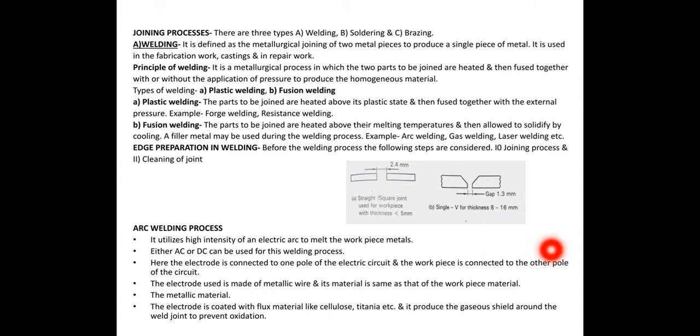Either AC or DC current can be used for this welding process. The electrode is connected to one pole of the electric circuit and the workpiece is connected to the other pole. The electrode is made of metallic wire, with material same as the workpiece material. It is coated with flux material, such as cellulose or titania, which produces a gaseous shield around the weld to prevent oxidation.

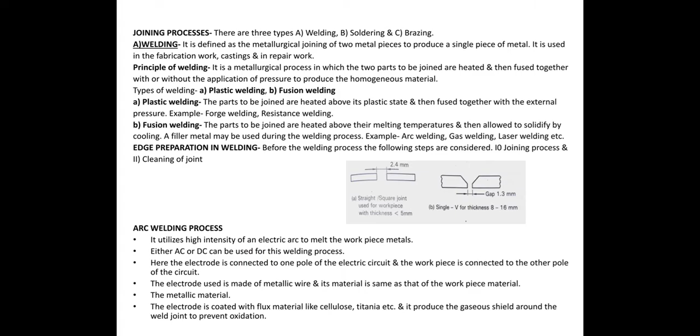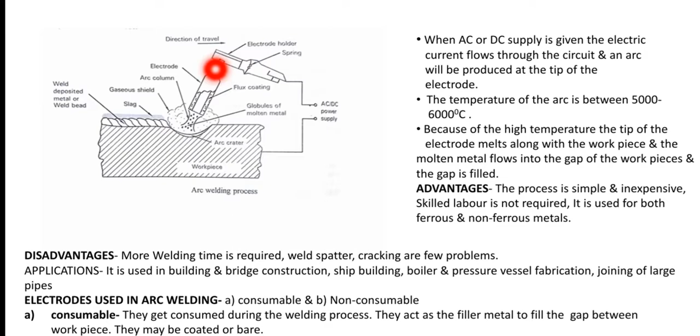Let me explain with the diagram. This shaded portion is the workpiece, and this is the electrode. Here you see the flux coated portion, this is the flux coating, and this central portion is the electrode itself. The electrode is coated with flux material such as cellulose or titania.

When burning of the electrode takes place, it produces a gaseous shield that protects the weld so atmospheric oxygen cannot enter. If atmospheric oxygen enters, after the welding process the weld may become porous. That is the main problem.

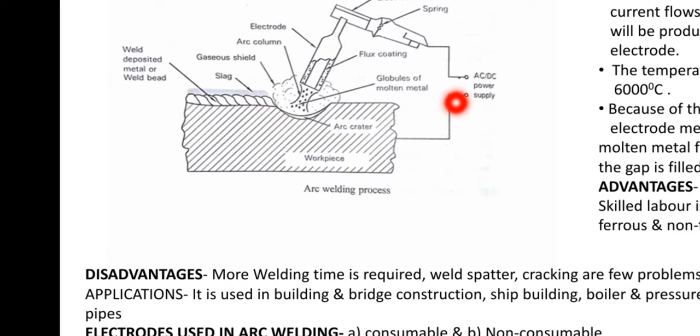This is the electrode, connected to one pole of the electric circuit, and the workpiece is connected to the other pole. When either AC or DC supply is given, at the tip of the electrode an arc is produced.

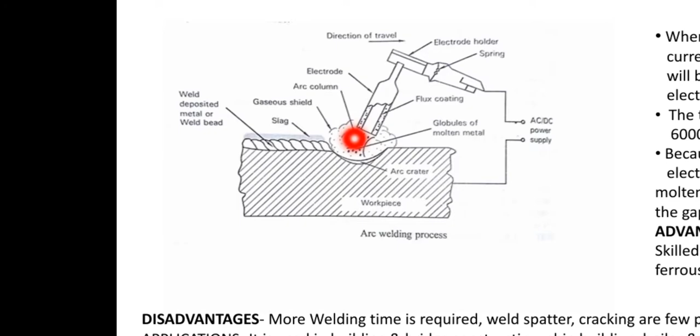This is the arc, and because of the arc the metal is melted and that melted metal flows into the gap of the two workpieces. After cooling, a single workpiece is produced. This much portion is welded, meaning weld deposited. Here is the gaseous shield, this is the arc, and this is the flux coating.

Generally the temperature of arc welding is 5000 to 6000 degrees Celsius.

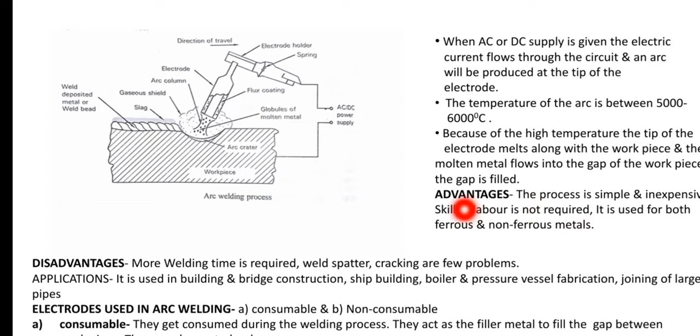What are the advantages? The process is simple and inexpensive. Skilled labor is not required, and it is used for both ferrous and non-ferrous materials.

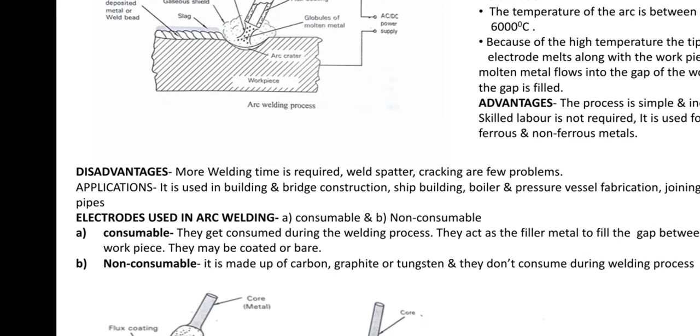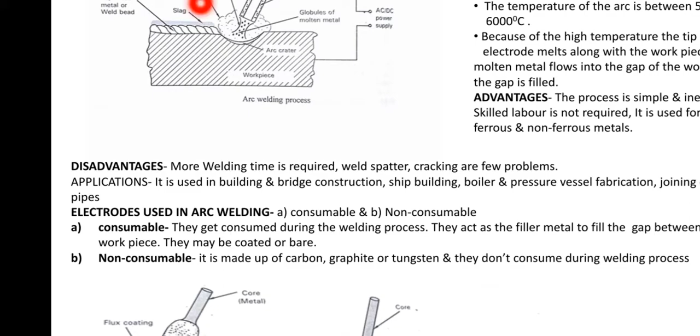What are the disadvantages? More welding time is required, and there is weld spatter. After welding, small metallic portions get deposited on the workpiece, and we have to remove them with small files. These are known as weld spatter. Cracking is also a problem.

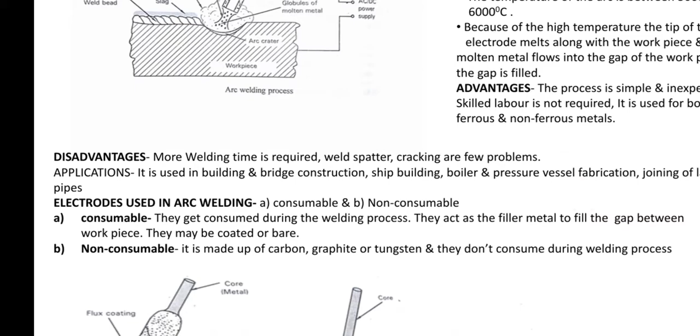Applications: it is used in building and bridge construction, civil engineering, shipbuilding, mechanical engineering, boiler and pressure vessel fabrication, and joining of large pieces.

Now we have to study which types of electrodes are used in arc welding. There are basically two types: consumable and non-consumable.

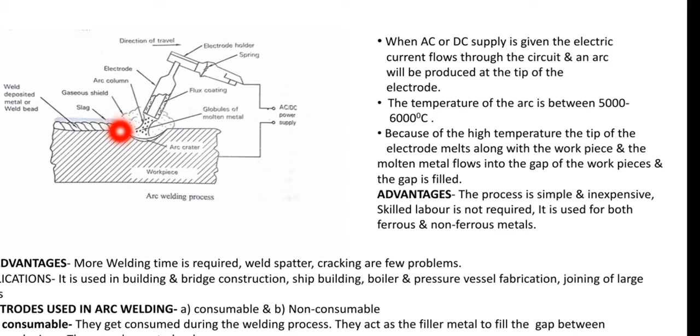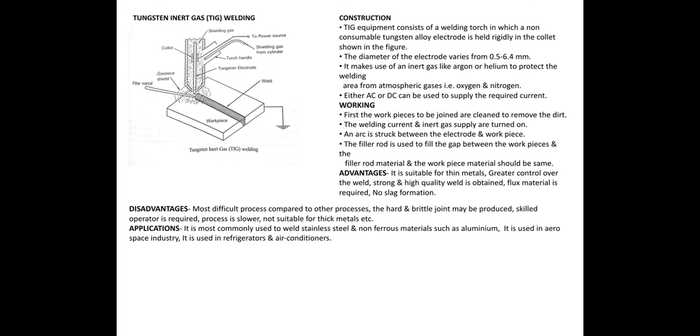In the next video we will discuss tungsten inert gas welding, that is TIG, and metal inert gas welding process. Thank you.